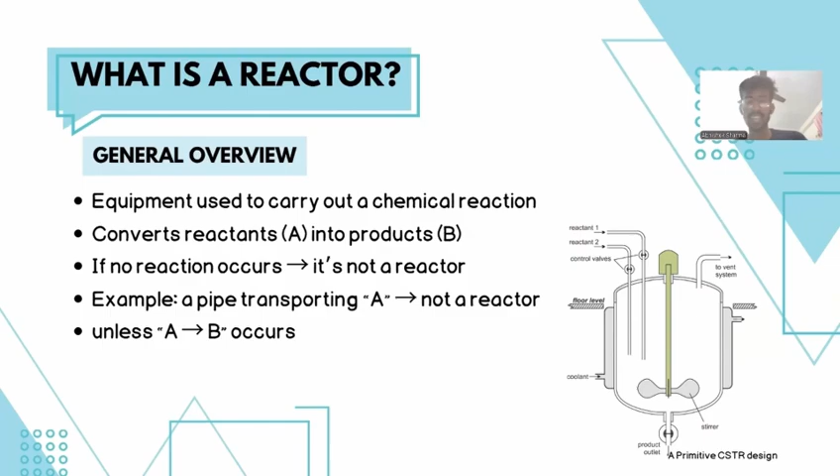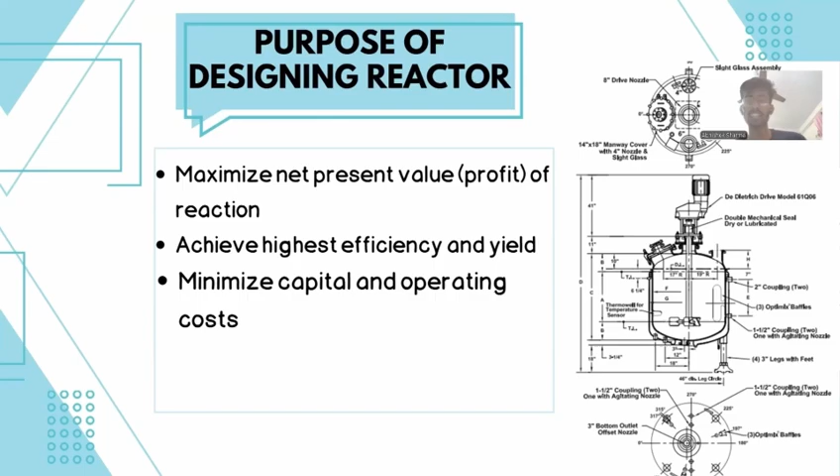So what is a reactor? A reactor is the equipment in which a reaction is carried out, converting reactant into product. If reaction is not taking place inside a tank, we cannot say it is a reactor. For example, a transportation system is not an example of a reactor. The main purpose of designing a reactor is to maximize the profit in the industry. We can do it by achieving the highest efficiency and yield of the reactions taking place in the reactor, and we also want to minimize the capital and operation cost.

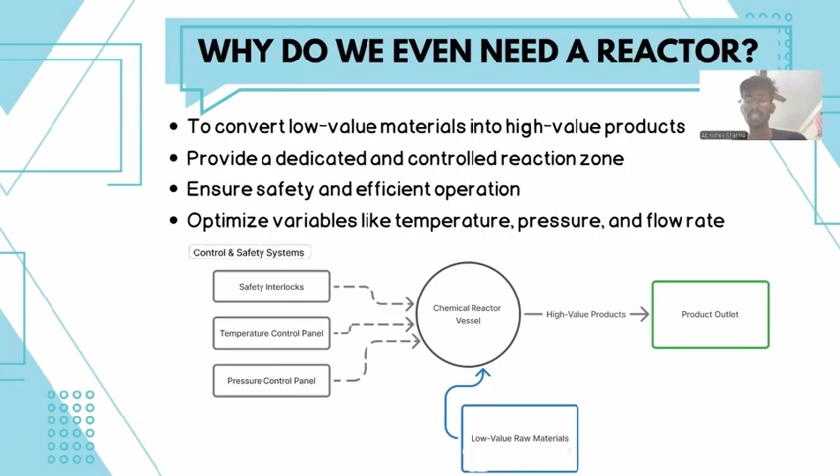Why do we even need a reactor? A reactor is a device which converts low value material into high value product. It also provides a dedicated and controlled reaction zone in which we can do the reaction very safely and in an efficient manner. It also optimizes variables like temperature, pressure, and flow rate that are optimal for a reaction.

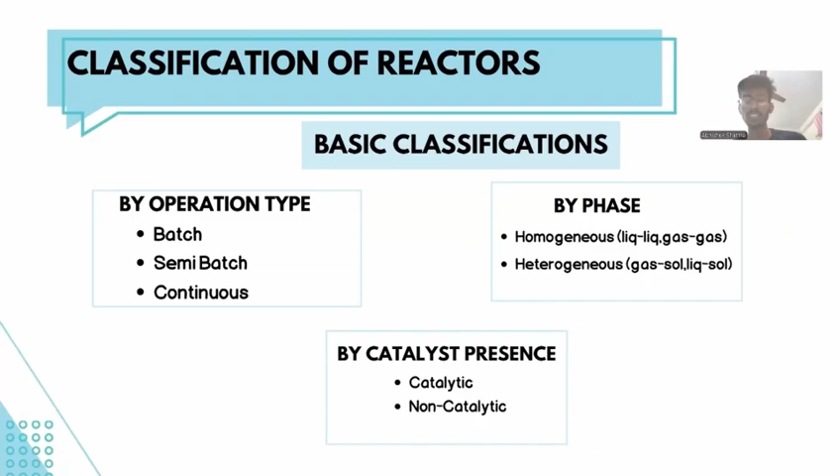These are the classifications of reactors. On the basis of operation type, there are three types of reactors: batch reactor, semi-batch reactor, and continuous reactor. On the basis of phase, there are two types: homogeneous reactor and heterogeneous reactor. And on the basis of catalyst presence, there are two types: catalytic and non-catalytic.

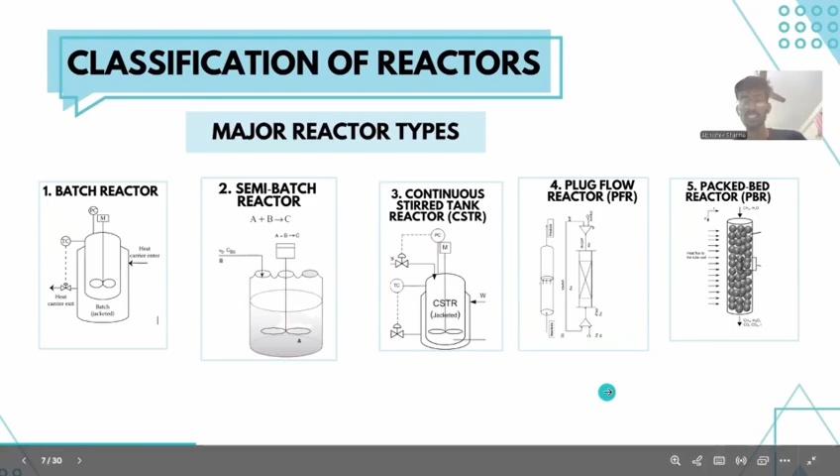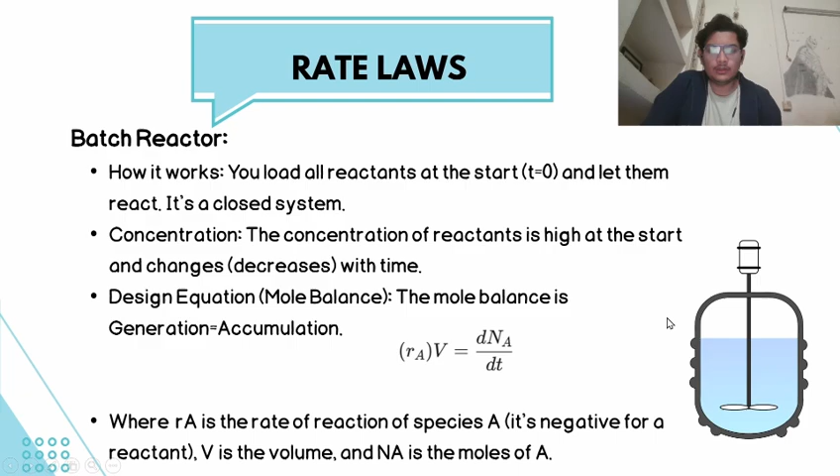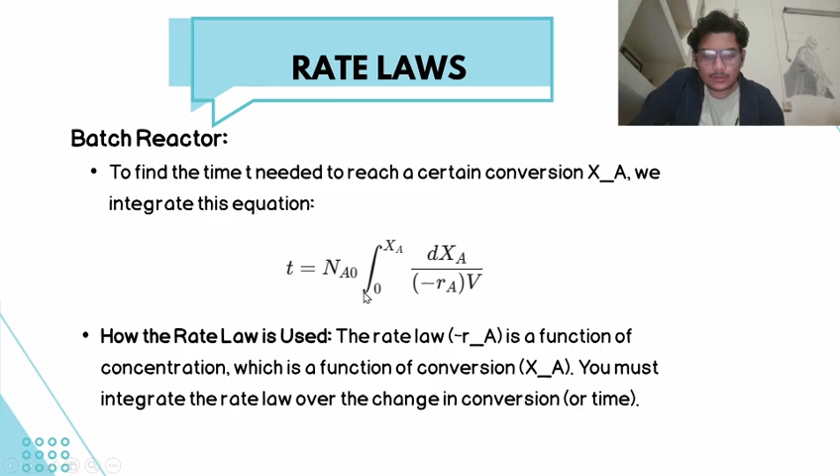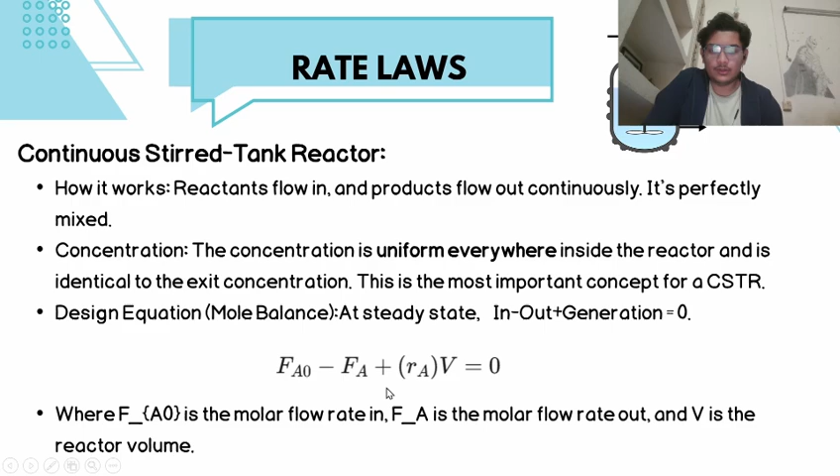Moving on, we have the continuous stirred tank reactor, also known as CSTR. In this, the concentration is uniform everywhere and identical to the exit concentration. The reactants flow in and the products flow out continuously, and they are perfectly mixed. Here we have shown the design equation at steady state, which is in minus out plus generation equals 0, and we have calculated the volume needed for a certain conversion XA. This is an algebraic equation because rA is constant throughout the reactor.

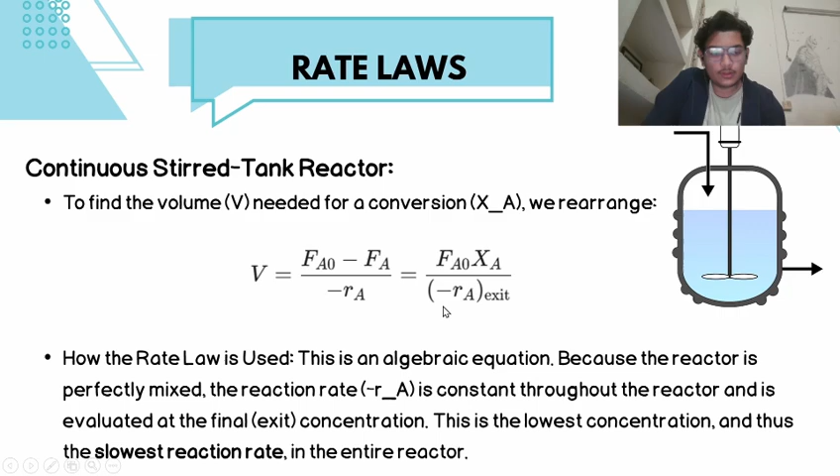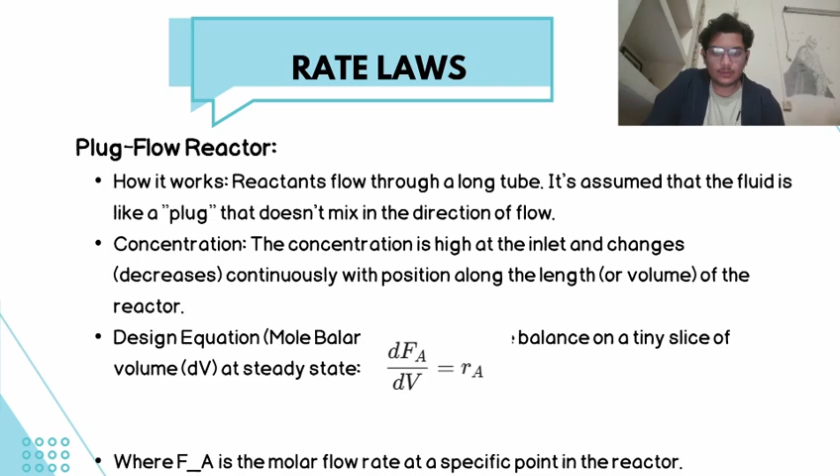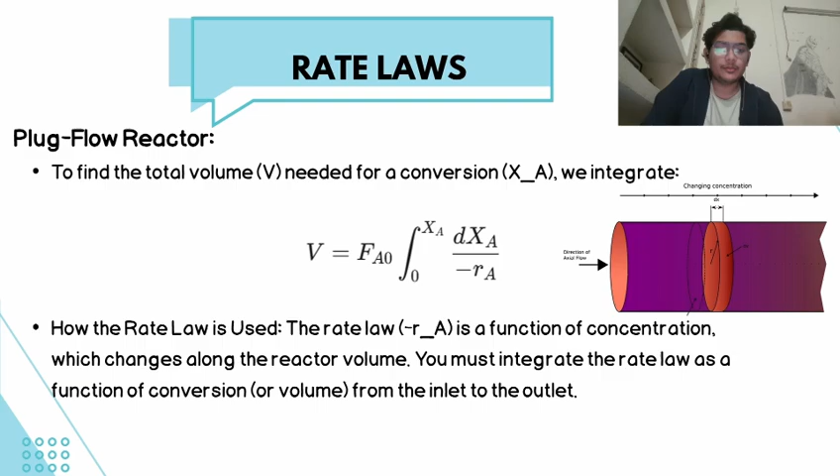Moving on, we have the plug flow reactor, which looks like a long tube in which reactants flow through, and they don't mix in the direction of the flow. The concentration is highest at the inlet and decreases with position along the length of the reactor. This is the design equation, formed by taking small slices of the long tube. We have calculated the volume we need for a certain conversion XA. Here the equation is also in integral form, because the rate law depends upon the concentration, and the concentration depends upon the position.

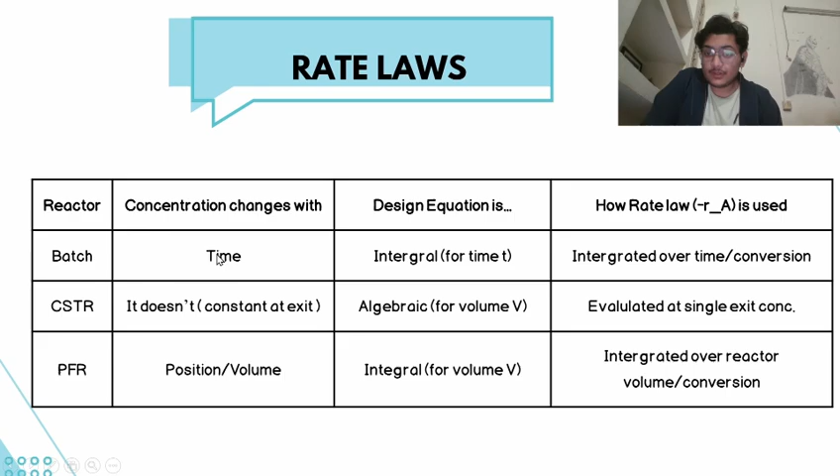So here we have differentiated the reactors we just studied. In batch and PFR, the rate law is not constant, whereas in CSTR it is constant. The design equation of the CSTR is algebraic, whereas for batch and PFR it was integral. The concentration in batch changes with time, in PFR it changes with volume, but in CSTR it doesn't change. Here is a further, deeper comparison.

So the batch reactor is unsteady, like the operation method is unsteady, and CSTR and PFR are both steady. Batch reactor is closed. CSTR and PFR, we know that the reactants flow throughout. And in batch reactor, the mixing is complete. In CSTR also, the mixing is complete. But PFR, the mixing is only radial. It doesn't mix in the direction of the flow.

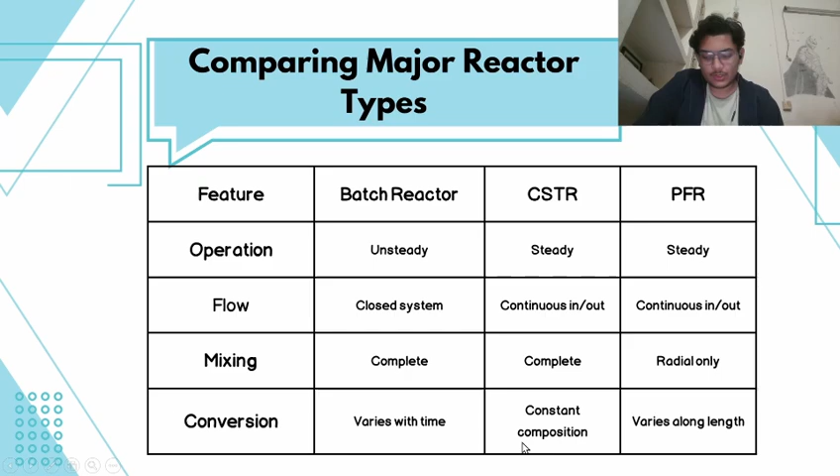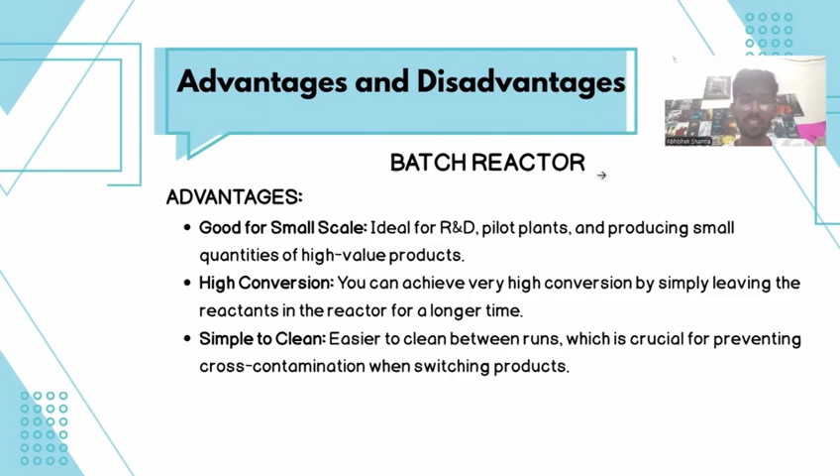We just discussed that. And the conversion varies with time in batch reactor. CSTR, we have a constant composition because of a constant concentration and rate law. And in PFR, it varies with length. Continue with the advantages and disadvantages of the reactors. So the advantages of the batch reactors is that they are good for small scale reactions. We can achieve high conversion rate in batch reactors and they are simple to clean.

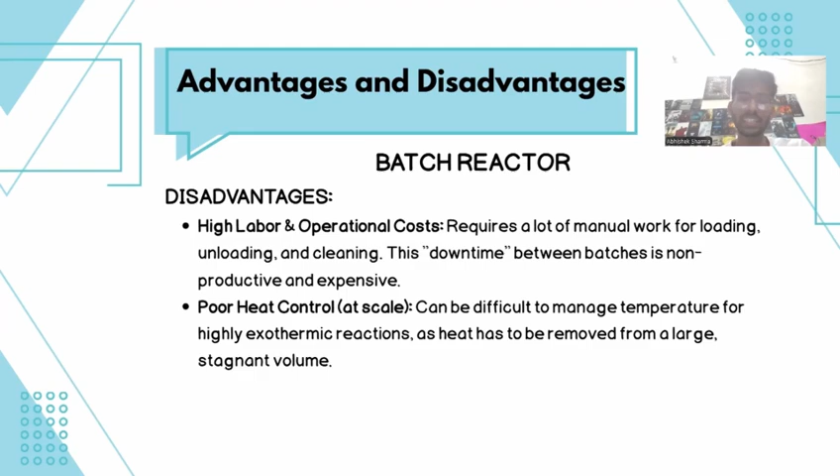These are some disadvantages of the batch reactor, that a lot of manual work for loading and unloading and cleaning. And other than that, they provide poor heat control at scale. So it is difficult to manage temperature for highly exothermic reactions. So these are the advantages of CSTR. They are excellent in controlling temperature. So we can do exothermic reactions easily in these types of reactors, and we can get good mixing in these types of reactors. And they are stable and continuous operational. So we can control and automate for steady production in the CSTR.

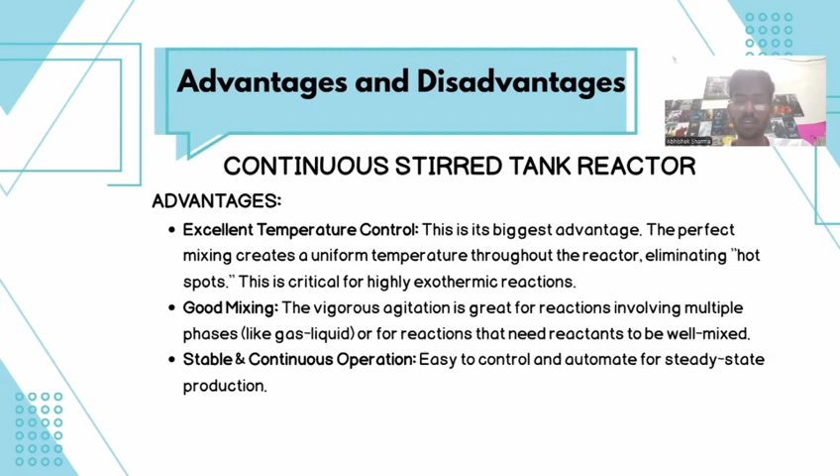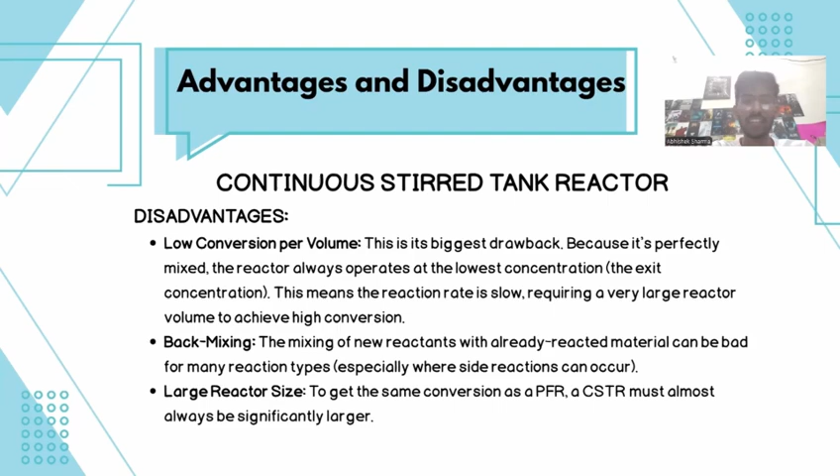These are the disadvantages of continuous stirred tank reactor. They provide low conversion per volume, and other disadvantage is back mixing. The product gets mixed with the reactant after the reaction, and they are very large in size, so it is difficult to operate them. These are the advantages of plug flow reactor. The main advantage is that it provides highest conversion per volume than other reactors like CSTR and batch reactor. This can take place in these types of reactor.

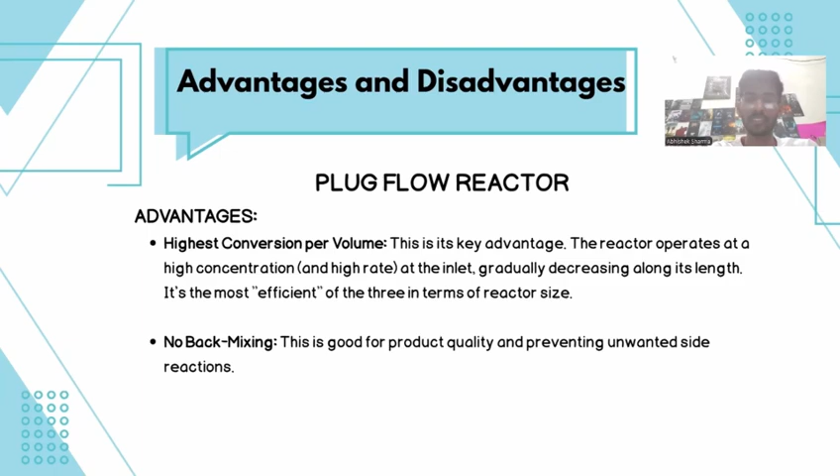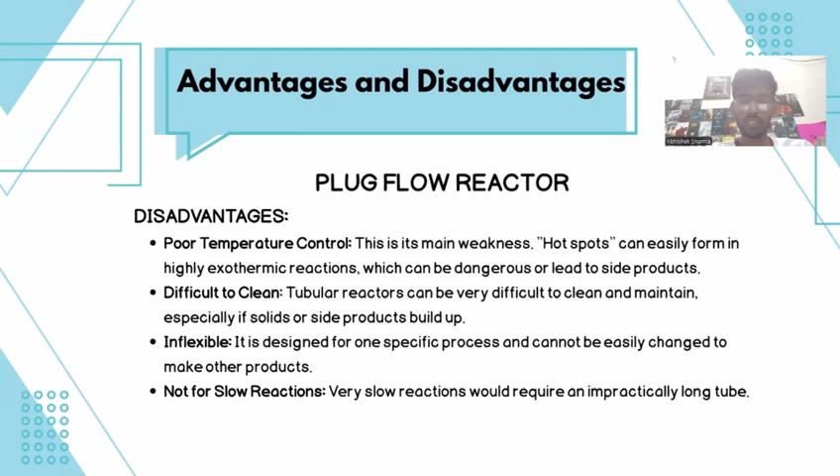These are the disadvantages of plug flow reactor, that it does not control temperature efficiently because there are some hot spots in plug flow reactors, and it is very difficult to clean the plug flow reactor, and they are very inflexible, not for slow reactions. In conclusion, we defined chemical reactors and their classification, understood lab and micro scale reactors, learned basics and mole balances about their rate of reaction, and compared advantages and disadvantages of the batch and CSTR.

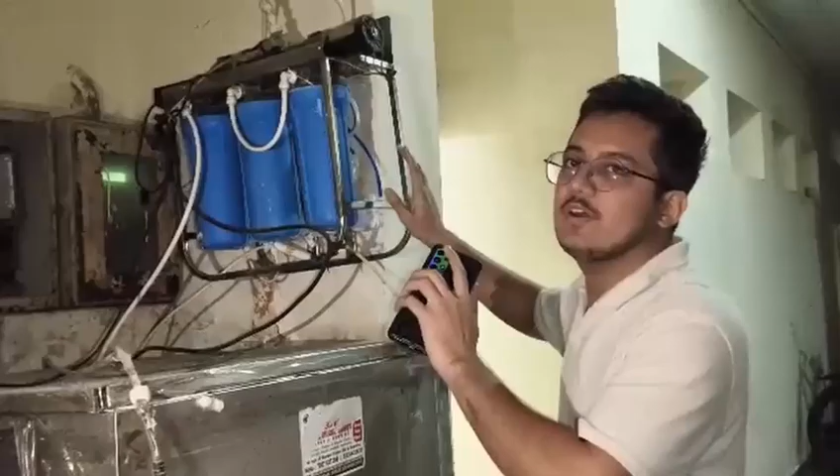Today we are going to know about the CSTR, the continuous stirred tank reactor. So in this type of reactor, all the reactants flow continuously into a tank, and everything is uniformly mixed. And the reaction is taking place at the same time while the product is getting out of the reactor. So as you can see, this pipe is the inlet, and this is the outlet. Everything is happening inside the water purifier, like there is active charcoal or UV light that is purifying the impure water that is entering through the inlet and exiting through the outlet. And the wastewater is eventually getting out of an extra outlet into the dump water.

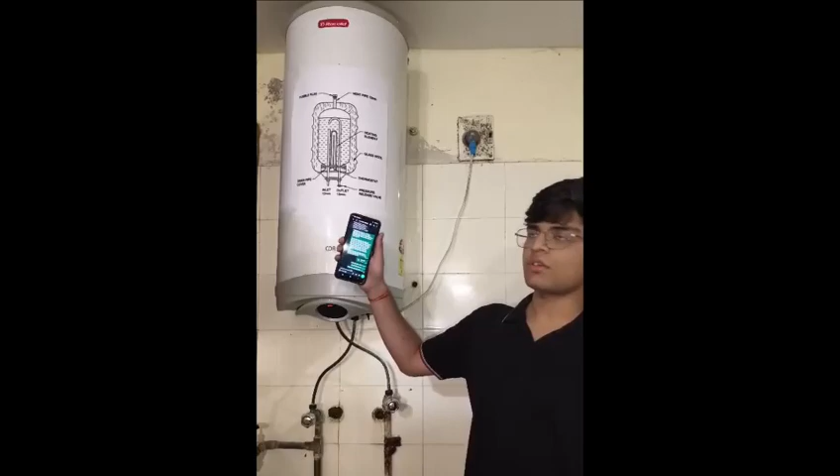So a plug flow reactor is a system where the fluid moves continuously through the flow, and as it moves, it reacts with the elements inside the system. A water geyser works in a similar way, where the inlet cold water goes into the water geyser, where it exchanges heat with the heating element of the geyser, and as it flows past the heating element, its temperature increases more and more, and we get hot water at the outlet pipe.